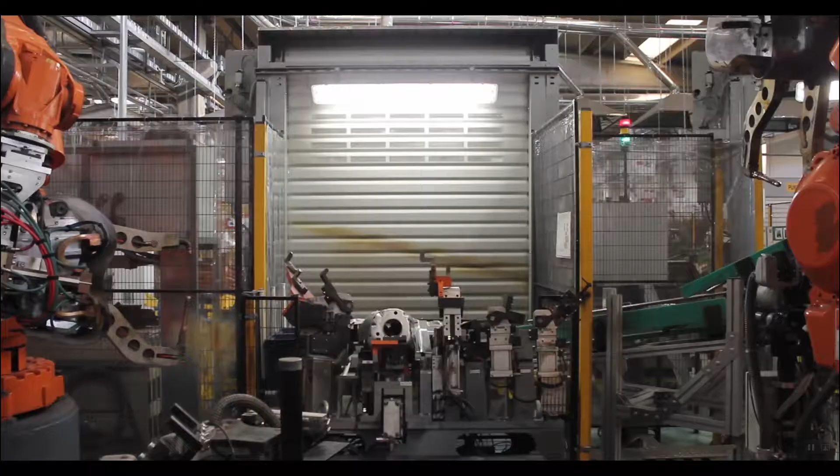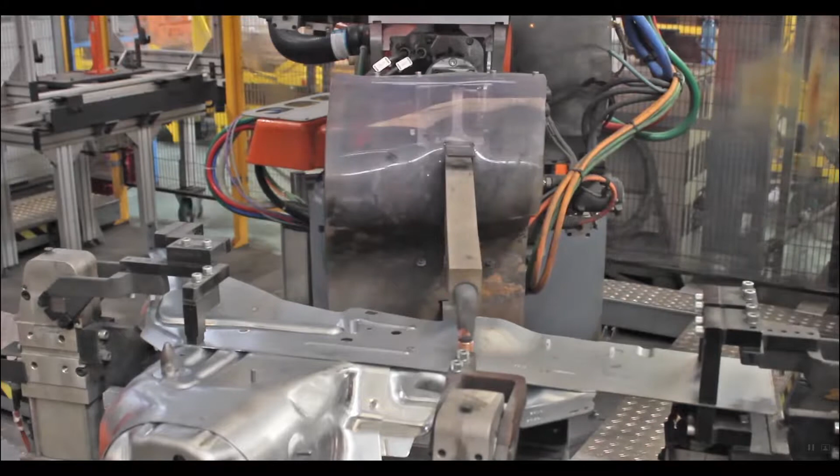Spot welding or resistance spot welding is a type of electric resistance welding used to weld various sheet metal products through a process in which contacting metal surface points are joined by heat obtained from resistance to electric current. The process uses two shaped copper alloy electrodes to concentrate welding current into a small spot and to simultaneously clamp the sheets together. Workpieces are held together under pressure exerted by electrodes.

Typically, the sheets are in the half to 3 mm thickness range. Forcing a large current through the spot will melt the metal and form the weld. The attractive feature of spot welding is that a large amount of energy can be delivered to the spot in a very short time. This permits the welding to occur without excessive heating of the remainder of the sheet.

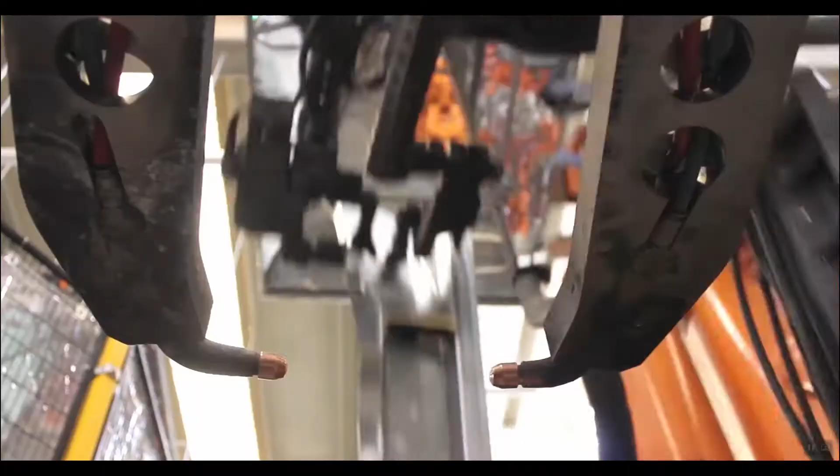The amount of energy delivered to the spot is determined by the resistance between the electrodes and the magnitude and duration of the current. The amount of energy is chosen to match the sheet's material properties, its thickness and type of electrodes. Applying too little energy will not melt the metal or will make a poor weld. Applying too much energy will melt too much metal. Ejection happens and it will eject molten material and make a hole rather than a weld.

Another feature of spot welding is that energy delivered to the spot can be controlled to produce reliable welds. Spot welding is typically used when welding particular types of sheet metal, welded wire mesh, or wire mesh. Thicker stock is more difficult to spot weld because the heat flows into the surrounding metal more easily. Spot welding can be easily identified on many sheet metal goods, such as metal buckets.

Aluminum alloys can be spot welded, but their much higher thermal conductivity and electrical conductivity requires higher welding current. This requires larger, more powerful, and more expensive welding transformers. Perhaps the most common application of spot welding is in the automobile manufacturing industry, where it is used almost universally to weld the sheet metal to form a car. Spot welders can also be completely automated, and many of the industrial robots found on assembly lines are spot welders.

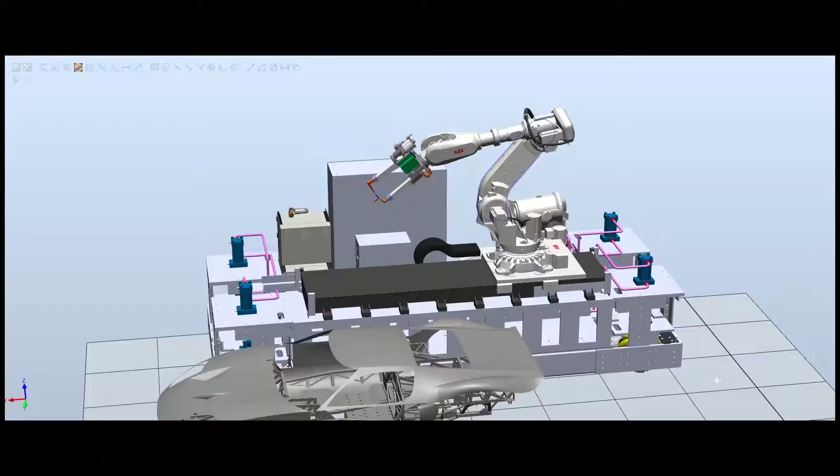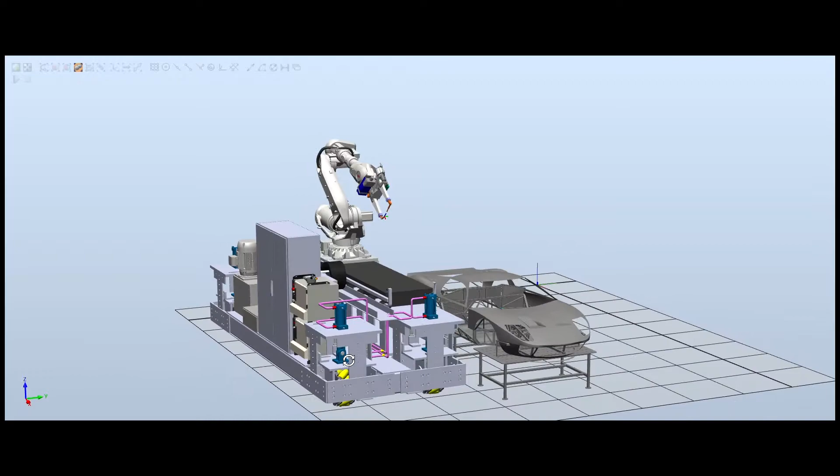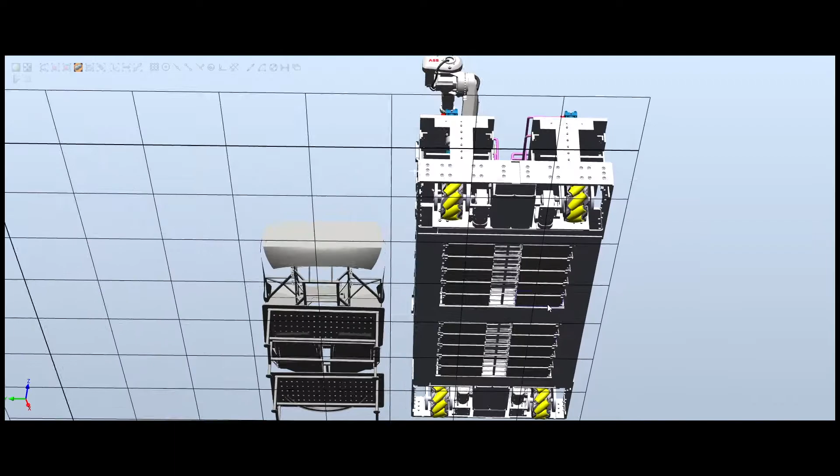So as you see, I have modeled this platform in RobotStudio, and I just want to show how it works. It's basically a robotic hydraulic platform, in which the electrical cabinet, the hydraulic circuit and the hydraulic pump are integrated. It is based on four cylinders that, when needed, can lift up the whole platform, and with omnidirectional wheels and four motors attached directly to each omnidirectional wheel, the platform can move.

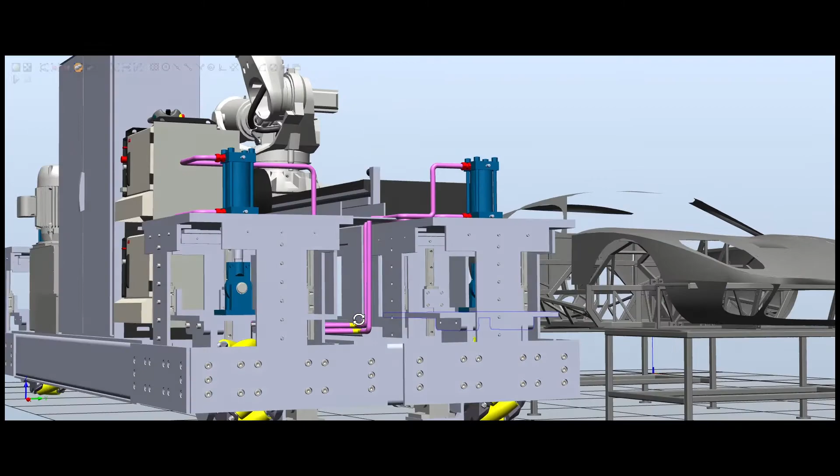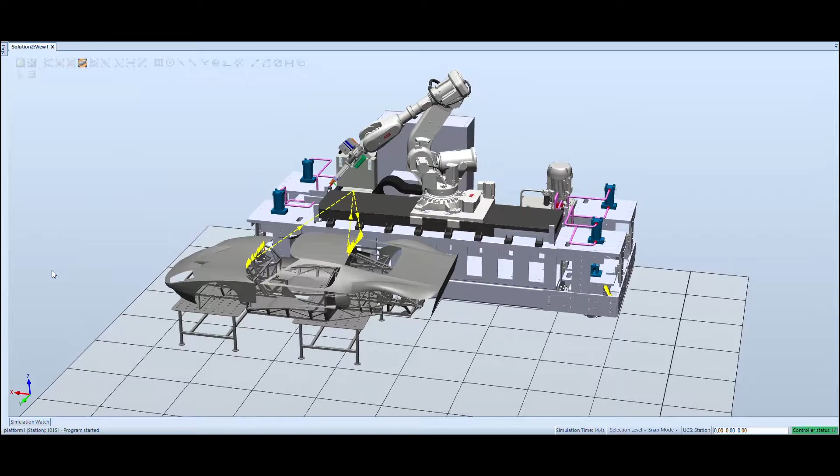Also, there is a battery pack integrated underneath the platform, so it can easily switch from DC to AC and from AC to DC with a converter, also placed on the platform. And in this model, I have used an ABB robot, which can be used for spot welding. I have taught the targets and the points needed to do the spot welding, and also tried to simulate the spot gun, how to reach the points needed on the metal sheets, and how to be activated.

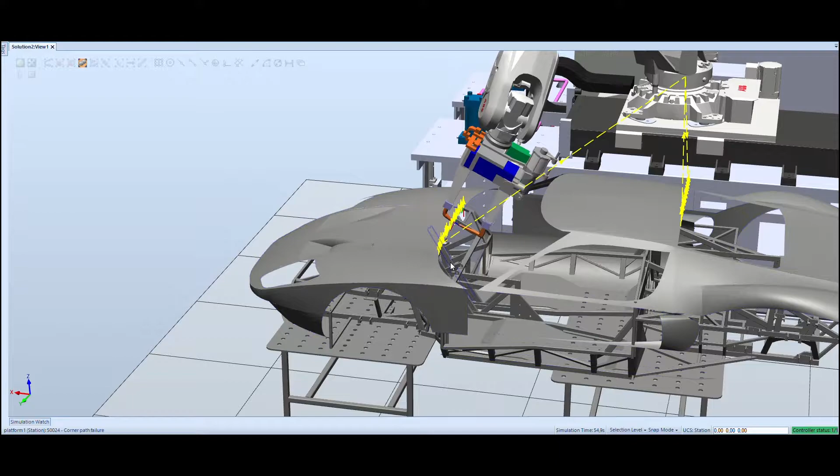All this information is provided on my podcast website, along with the text, and you can realize how you can also work with the signals, because the signals need to be triggered. Usually it's like that. If you want to trigger a tool, for example, closing or opening a gripper, or just activating the welding system, you have to communicate with the PLC.

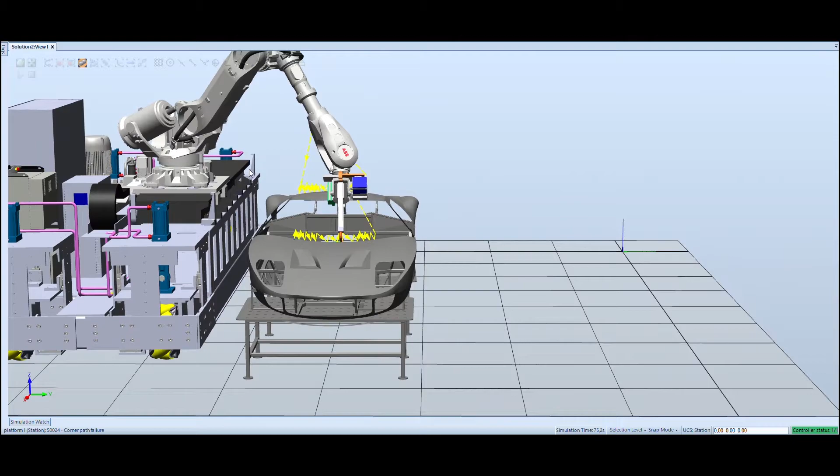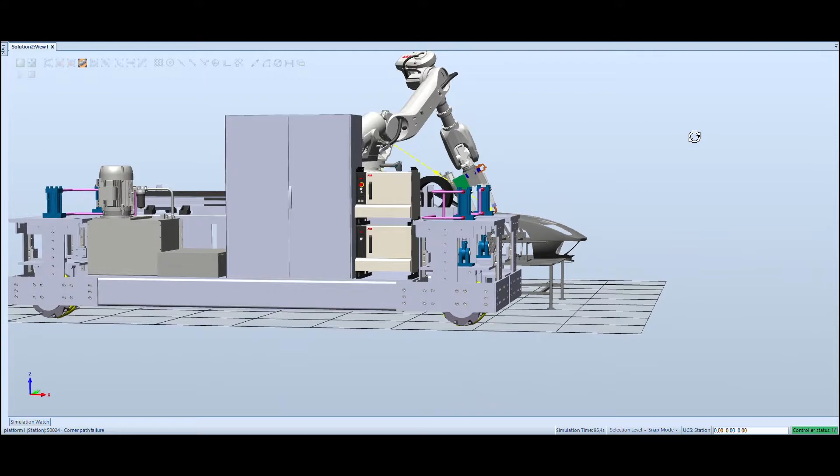And in the electrical cabinet, I have considered a PLC from Siemens, S7-1200. And in this PLC, there is a communication. So the PLC plays a role as a master, and the robot as a slave. So it means that we will ask where to activate the gun, and also where to activate the gripper. In this example, we have also considered a rail system so that the robot can reach the desired points, even if the platform is stationary.

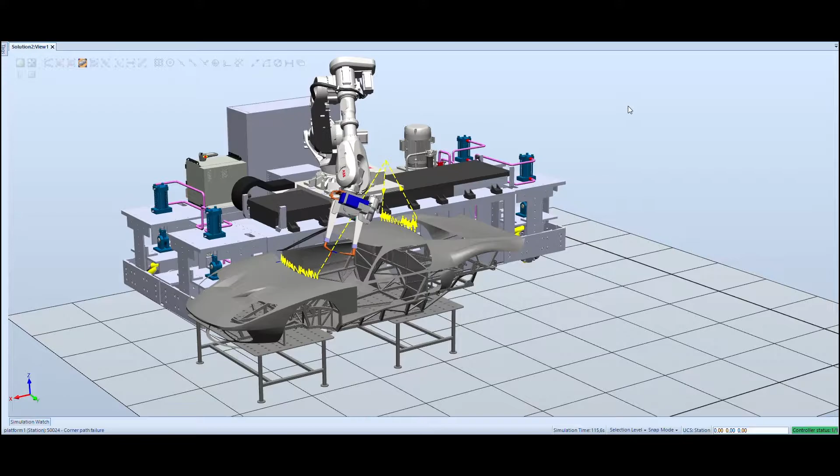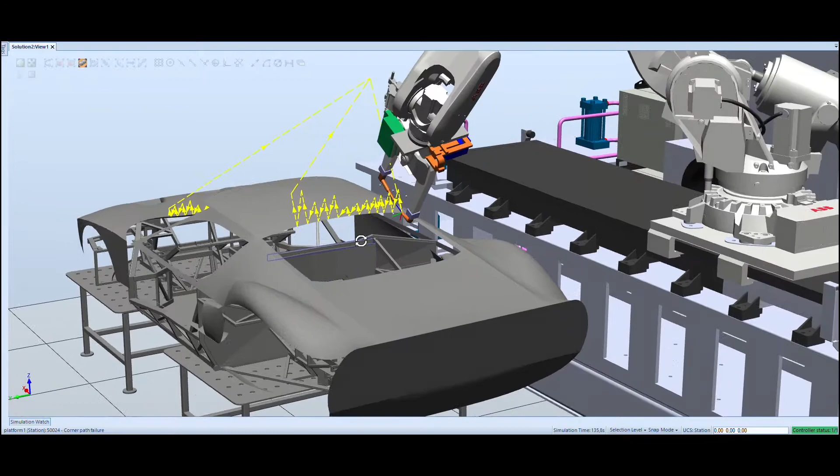Of course, it's easy to move the platform somewhere else, and that's actually the benefit of this platform: it's movable, and someone can easily move the platform to the next station, and the job can be done in that place. So you don't need to buy a lot of robots. You can basically put this robot on this platform, move the platform to the specific place, fix it there, and then the robot can do the job. The only thing is that the calibration needs a little bit of time, but it also can be done automatically.

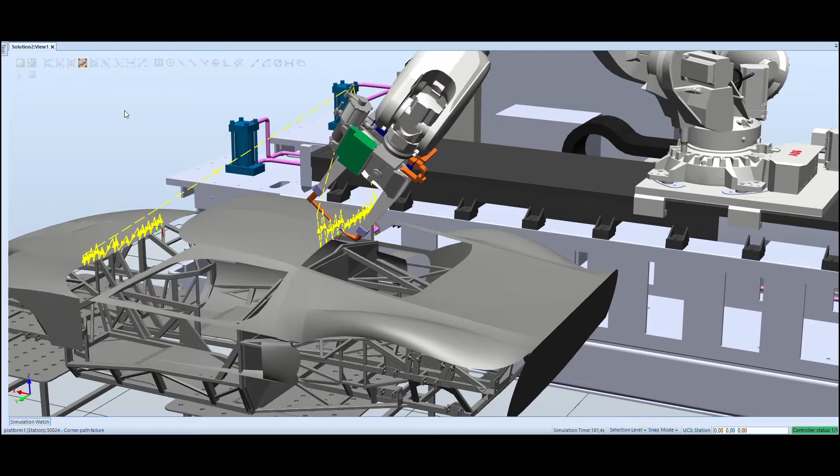But this platform basically is not an autonomous platform. It means that someone needs to control the movement of the platform to the desired place, and then the pre-program of the robot can be carried out. And in this example, as you see, I have considered a rail, which gives extra freedom for the robot to reach places that are not possible if the robot was fixed in place. But it's not a must. You can design whatever you want. You can place your robot stationary, and then if needed, just make a rail that has more reachability.

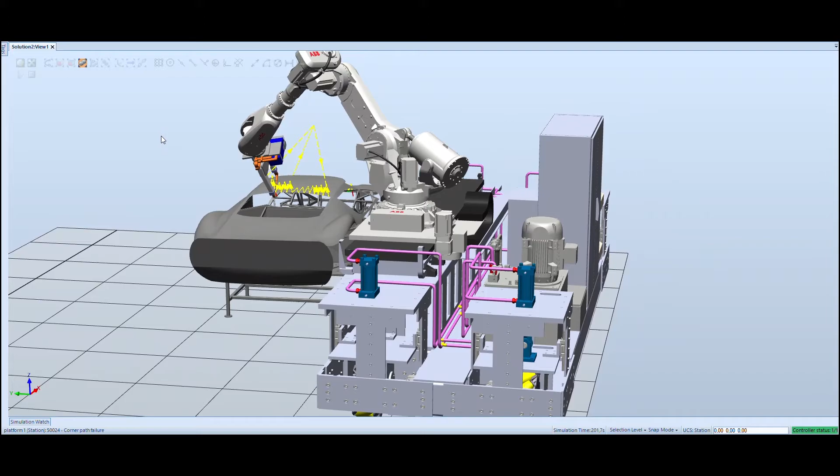So in this example, I tried to show how spot welding works, and as you see, after the robot has done the job, it goes back to the home position for the next job. I hope that you have enjoyed this episode.